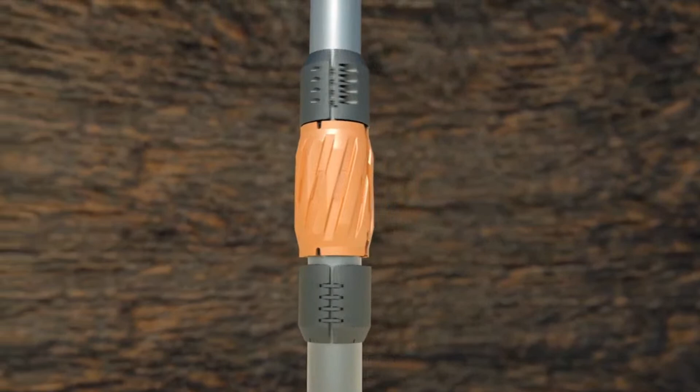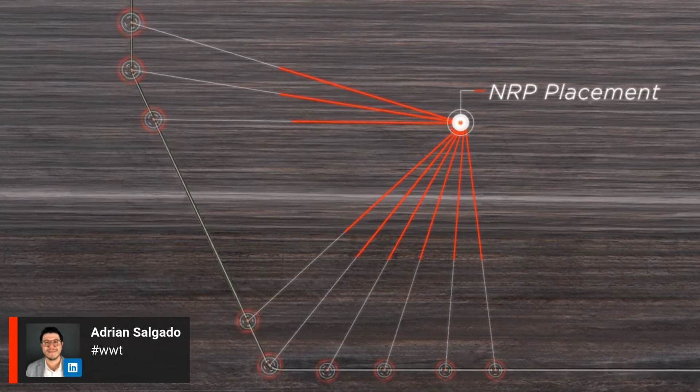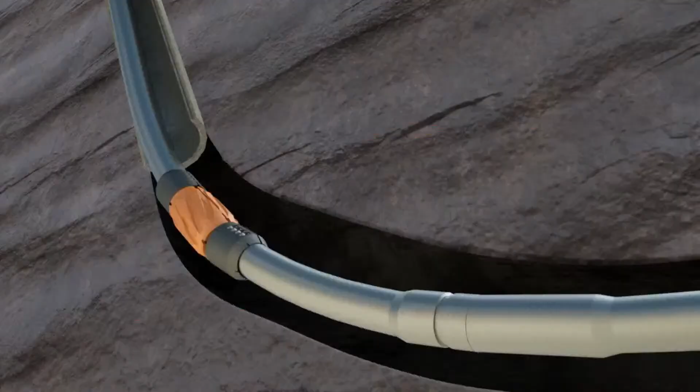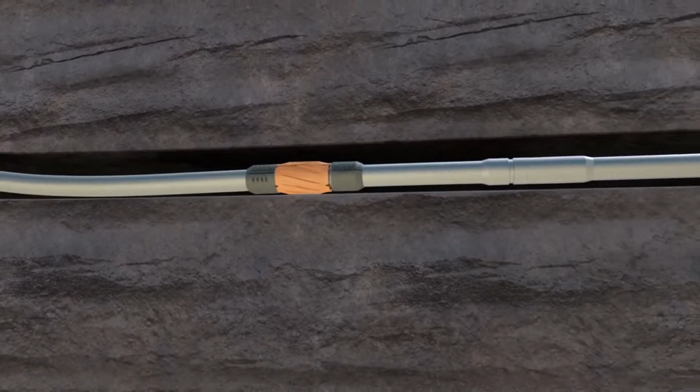WWT non-rotating protectors, otherwise referred to as NRPs, are the world's most widely used mechanical drill string, torque, and friction reduction tools. NRPs optimize drilling performance by delivering maximum energy to the bit while reducing torque, drag, casing and riser wear, heat checking, and buckling. Friction occurs when the drill string rotates and slides in the wellbore. WWT's patented fluid-bearing technology within the NRP sleeve creates maximum torque reduction. WWT provides a torque and drag analysis to identify specific areas within the wellbore to place NRPs. NRPs are typically placed across intervals where high side forces are analyzed, such as build or drop sections of the wellbore. NRPs are commonly used in horizontal, S-shaped, extended reach, and even vertical wells when unexpected dog legs are encountered. Unlike conventional rotating drill pipe protectors, the patented NRP rotates minimally to provide torque reduction without adversely affecting axial drag. NRPs provide the most efficient solution for reducing friction-related challenges that impede drilling performance while mitigating casing and drill pipe wear. WWT's NRP is a multifunctional tool with more than 30 years as a proven solution for reducing torque, drag, buckling, and heat checking, while protecting your casing and riser from preventable wear. WWT offers a no-cost confidential analysis with a recommended NRP proposal on your well, and 24/7 support both on and off the field.

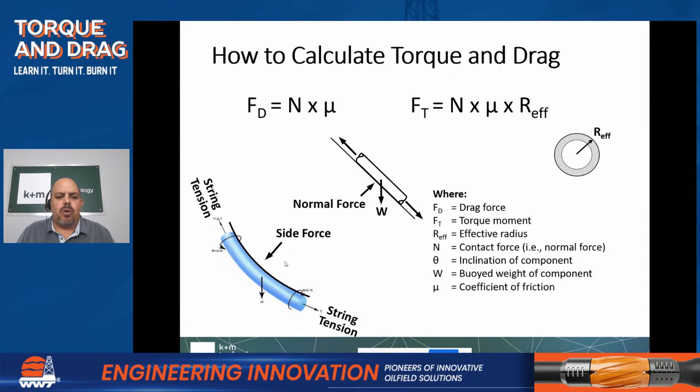There are a couple of different things that contribute to normal force. One is just the weight of the pipe laying on the low side of the hole. Another is the amount of side force that happens when you take something, put it across a curve, and put tension on it. There are actually 4 total contributors to drag: the weight component, the tension component, and whenever you have a curve, what's called the capstan effect.

Let me see if this is in frame so I can demo something. I have a wire right here—hopefully you can see the back of my chair. If I take this wire and put it across the bend without any tension on it, it does not push into the chair very hard. If I start pulling tension on it, you can almost see the fake leather of the chair start getting indented. That's the normal force due to tension around a curve.

And then whenever you put pipe into compression and it buckles, that pushes into the side of the hole a little harder. One of the topics a few weeks ago was the difference between stiff string models and soft string models, which try to account for the stiffness effect. Pipe is steel, it's inherently rigid, so if you try to bend it, it wants to go straight. Most of what I'm going to talk about today concentrates on the first two things: the weight component and the tension component.

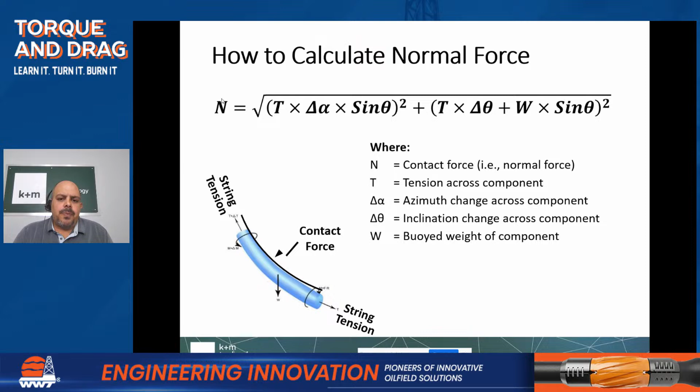So what are some problems that high normal force causes? One of them is obviously high axial drag—so not being able to run in hole, or running out of weight.

That could be with your drill string, that could be with casing, that could be with a liner. With a liner, if you're trying to run in the hole and you just can't get down to bottom, that's obviously because a high normal force times your friction equals a lot of drag. Drag always acts in the opposite direction of motion. So if you're trying to run in the hole and you have high drag, it's going to prevent you from getting down to bottom.

Well, it acts in the opposite direction of motion, so if you are trying to trip out of the hole and drag is really high, it might prevent you from tripping—either with a drill string, you try to pull and you exceed the tensile limit of the pipe, or the pull limit of the rig. So you try to do a straight pull and it doesn't work, and now you have to back ream out of the hole just to keep your tension low. So it could prevent you from running in the hole, and it can prevent you from pulling out of the hole.

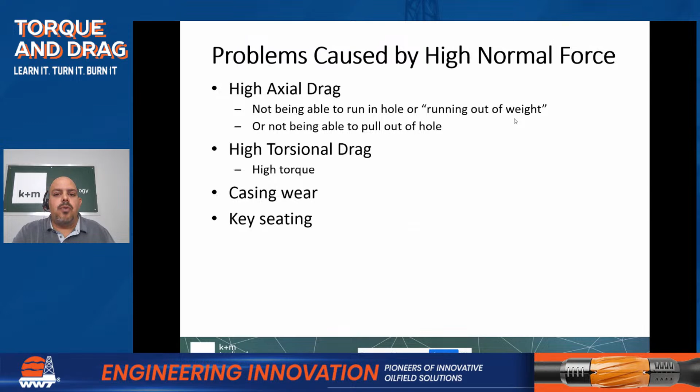So I said we ran out of weight. First, let's define what exactly we mean by running out of weight, because we hear that a lot. There are two contributors, two ways that you can, quote unquote, run out of weight.

One of them is a negative weight situation where the drag is so high that your hook load goes down and down, and then it's zero or less, and now you have to apply some push force to overcome that drag to continue tripping in the hole. If you had more weight available, you'd be able to trip in the hole.

So that's one. The other one is buckling. If you run out of weight because the pipe buckles, in this case it's not going to run down, even if I do apply weight. It's a frequent problem with drill strings.

If you're running a liner, the running string itself can buckle. Smaller casing, anything with a small OD, has less buckling resistance, so it's easier when you put it under compression that it starts to corkscrew and buckle.

And when that happens, supplying any more push is not going to help. The onset of buckling can be very sudden, so it's really hard to determine if it's buckling itself or some mechanical obstruction, in the absence of some torque and drag modeling.

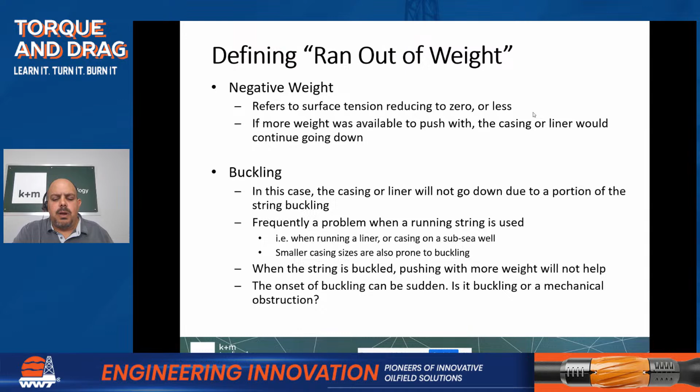But what the modeling is telling me, assuming the modeling is accurate and accounts for the additional normal force due to buckling, is that if I could push with 100,000 pounds at surface, I could actually get the casing down for up to a 0.6 friction factor. Let's say that's my design factor.

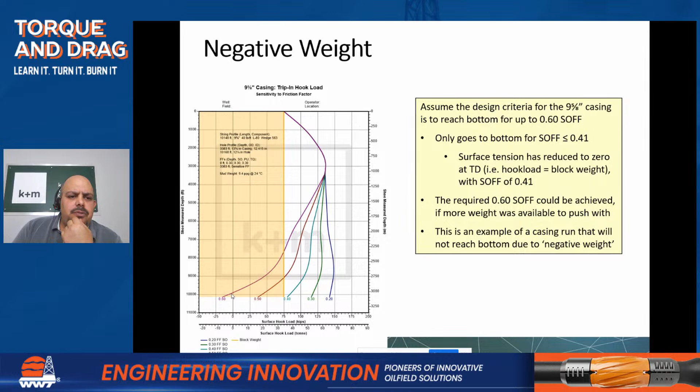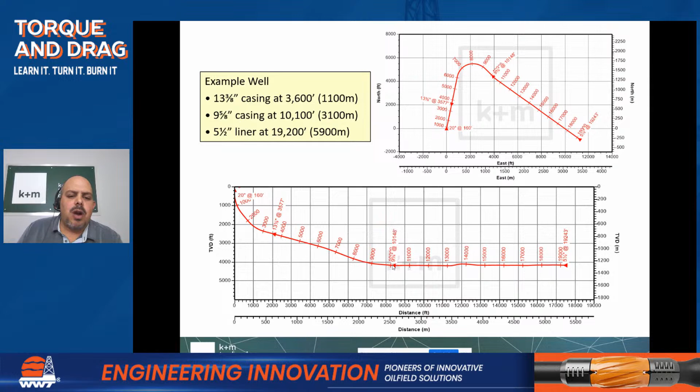This is a little confusing, so let me step back for a second. The next thing I'll show is this exact same hole, but assuming I drilled a slim well where I set 9 5/8 casing here, drilled an 8.5 inch hole, and now I'm running 5.5 inch casing in it. This is what it looks like.

If I have 9 5/8 casing in here, you can see that if I apply about 15,000 pounds of push, maybe a little more, I can get down for a 0.25 friction factor. For a 0.3 friction factor, it locks up.

That's what happens when this shoots off to the left — I don't know if things get mirror imaged or not, but it shoots off to this point over here. And if I went to negative one million, it would still go off to the left. What it's saying is it doesn't matter how much push I put on it — it's buckled and it's not going to go.

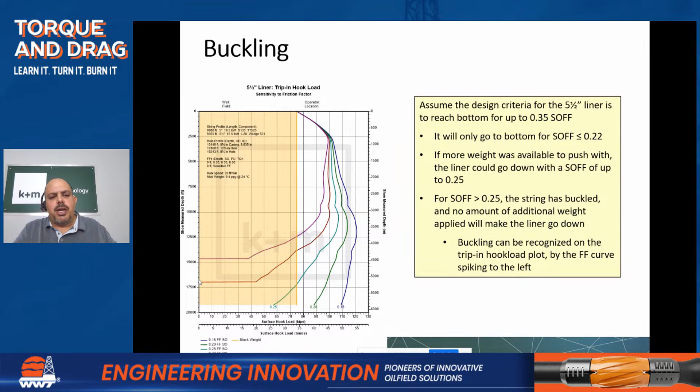Okay, we're about 30 minutes in, and I'm just going through concepts right now. The reason I'm spending time on this is because it's really important to identify the source of your problem in order to come up with a solution that works.

So again, I'm going to go back over these important equations and show them multiple times. Remember that the drag force is normal force times friction. Torque is normal force times friction times your effective radius, where effective radius is the radius of whatever is in contact with the wellbore. And then this is the normal force equation again.

So if my drag force is unacceptable, there are a couple ways I can go about finding a solution. The first one is just accepting that drag is what it is, and I'm going to have to overcome it. That only works if you have a negative weight solution. If you have so much compression that you have buckling, you can't just overcome that drag.

Okay, so that works for a negative weight solution. The other thing you can do, since drag force is two terms multiplied by each other, is try to reduce my normal force, or try to reduce friction. If I reduce either one of these, my drag force is going to go down.

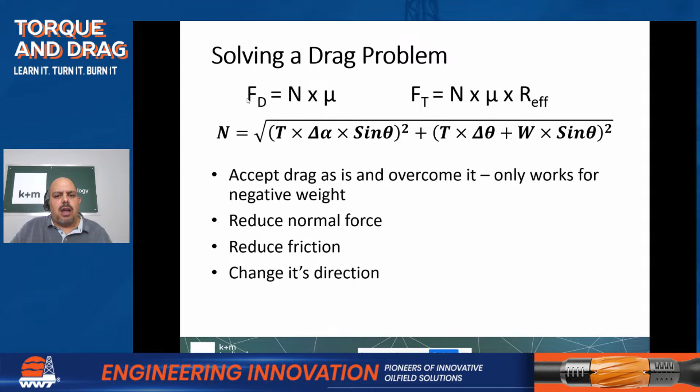The other thing I can do is change its direction. Brandon talked about this early on, and we'll discuss it a little bit more here. So if I have a lot of axial drag, can I change the orientation of that drag from axial drag to torsional drag?

So let's look at the solutions for negative weight: provide additional push to overcome your drag force.

In drilling, for the longest time we were drilling with motors. Rotary steerable was not a thing. With motors, you typically have some amount of heavyweight drill pipe in the low angle section of the well. That provides two purposes. One of them is it's a heavy component that overcomes the drag in the lateral part of your well, so you can overcome that drag and push down.

The other thing your heavyweight does is it transitions the pipe from compression to tension, and if you have tension in your string, you can't have buckling. That only works to a certain point, because if you have so much drag in your lateral that it buckles, then having heavyweight drill collars in the vertical section is not going to help.

And you're not going to be able to drill with a motor.

I started in '98. Just to give you a little bit about my history, I went to the University of Colorado, go Buffs.

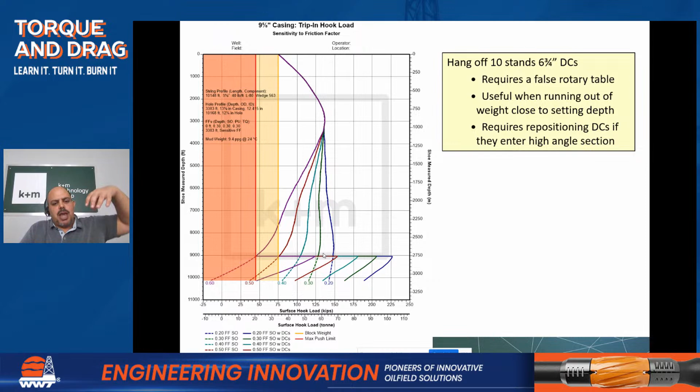Right when I install that packer, it's right below the rotary table. But as I go in the hole, as soon as it gets into the higher angle section of the well, it starts adding drag. So if this were to go a little bit further, I'd have to go in there, retrieve that retrievable packer, pick it up, and set it in the vertical section again. So it would require repositioning the drill collars if they enter the high angle section.

The other thing you can do to reduce your normal force is to reduce the dog legs in the shallow section of the well. You can reduce the dog legs in the shallow section of the well, reduce the weight in the high angle section of the well, or have it - we'll talk about floated casing here in a minute.

This is a possible solution for both - reducing weight in the high angle section of the well is a possible solution for negative weight and buckling, because if I reduce my normal force in the high angle section of the well and that reduces the drag to the point that I don't buckle anymore, then that solves both issues.

So we talked about why reducing the dog legs in the shallow section of the well matters, because when my angle is very low, the amount of normal force is very dependent on tension and how much inclination change I have.

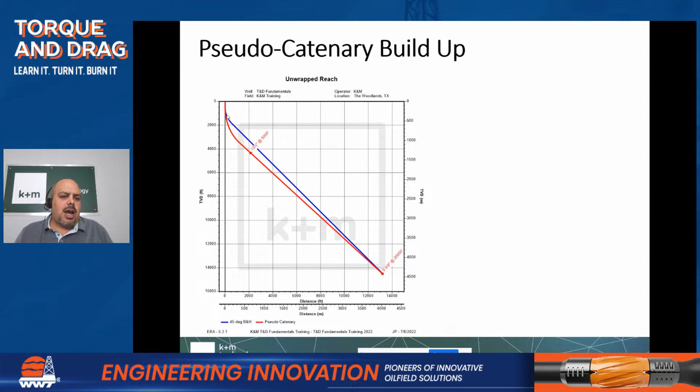So some people have thrown this term around, the whole pseudo catenary curve or catenary curve. What is a catenary curve? Here's an example well, a fairly deep TVD well, 14,000 foot, and I have a shallow dog leg here. The blue line is a 45-degree well with a 3-degree buildup. The red line is a well where I'm gradually increasing my build rate to build a catenary curve. What is a catenary curve? It's what's called the perfect curve - your side forces are normal or equal throughout the curve. You don't have higher side forces and then lower side forces; the side forces are uniform. It's how umbilical cords are hung, like the shape an umbilical cord makes when it's hung, or arches.

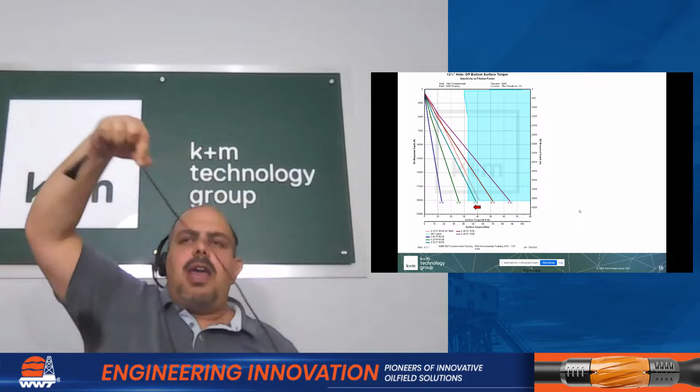See, I got a little prop right here - it's just a wire that I grabbed out of one of the offices. If I have my surface right here and say this is the downhole location, and I'm holding the wire, you can see that is not a uniform curve. It's not like a fixed build rate from surface here down to bottom - the build rates are lower here and higher here. Why is that?

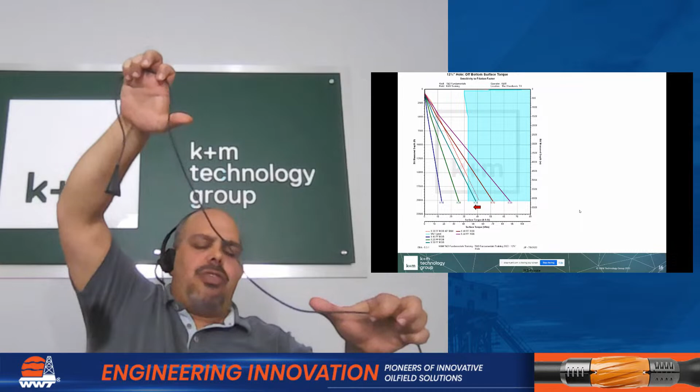Because the perfect curve means that normal force is constant throughout. How do you get a constant normal force? Well, at surface where tension is the highest, then my dogleg has to be the smallest. And as I go down and down, tension gets smaller and smaller, then my change in inclination, or build rate, can get higher and higher.

The reason why I'm bringing this up is because I've seen people hear the term catenary curve, pseudo catenary curve, and what they'll do is say, 'Oh okay, I like low normal forces, I want to solve this problem. I'm going to put a 300 section where I'm building at 1.5 degrees, then a 300 section building at 2 or 2.5 degrees, then a 300-foot section building at 3.5. Check the box, as I go deeper, inclination is increasing.'

Well, to properly... I'll get back to this. Well, okay, I guess I'll talk about this now.

What I'm showing here is the amount of torque generated for different friction factors with a 3-degree build and hold at 45 degrees. I have this light blue shaded area, say it's right around 30,000 foot-pounds of torque, which is right around the makeup torque of 5-inch drill pipe.

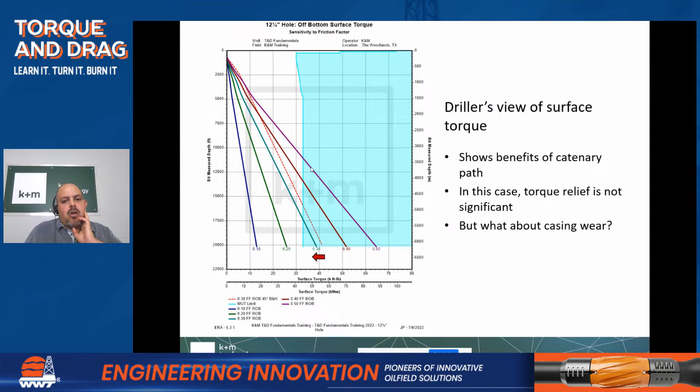So if I had that well, I would not be able to drill with 5-inch drill pipe unless my friction factor was less than 0.25. Anything higher than that, and it's a problem. And then the red line is the build and hold for the 3-degree build and holding at 45 degrees. These curves that I'm showing now represent this catenary curve shown right here.

So you're looking at this and it's saying, okay, well, with a 0.3 friction factor, I'm right around, call it 41,000 foot-pounds of torque with a straight build and hold. I've dropped it maybe 1,000 foot-pounds for a 0.3 friction factor with a pseudo catenary curve.

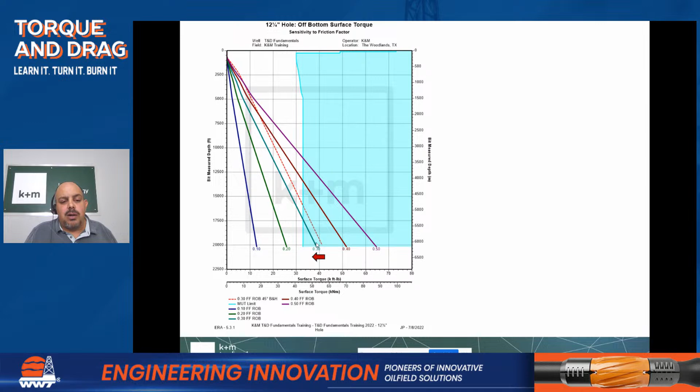And God, it was a lot of effort. I had to go in and put a schedule of increasing my build rates. Was this really worth it over 1,000 foot-pounds of torque? Well, if you look at the normal force...

Why is that? Well, because at higher than 2,000 pounds, casing wear does become a major concern. It's not to say that you're always going to have a casing wear problem if you have more than 2,000 pounds of side force, but it increases the risk quite significantly.

It'll depend on the hard banding, how high above 2,000 pounds, the formation you're drilling, it might even depend on the mud you're running. But if you have less than 2,000 pounds, one thing you can be comfortable with is your risk of casing wear goes down significantly.

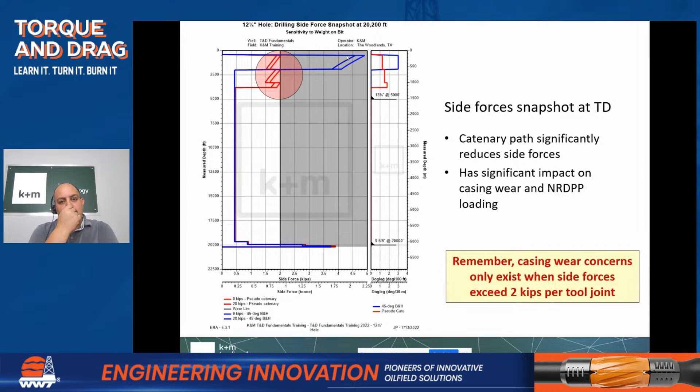Because it's called casing flotation, there are always a few people out there who think that the casing is, let me adjust my camera a little bit so you can see everything I'm doing with my hands, actually floating on the top side of the hole.

That is not the case. You do not want casing that's actually positively buoyant, because if casing is positively buoyant, it would push out of the hole. Anybody who has cemented surface casing or a surface conductor knows sometimes you have to chain it down so the casing does not float out of the ground before the cement sets up.

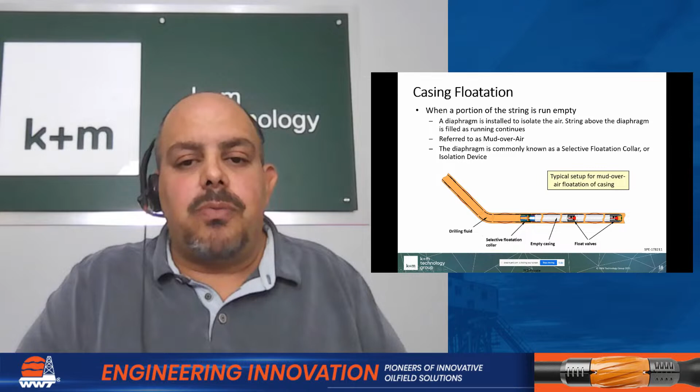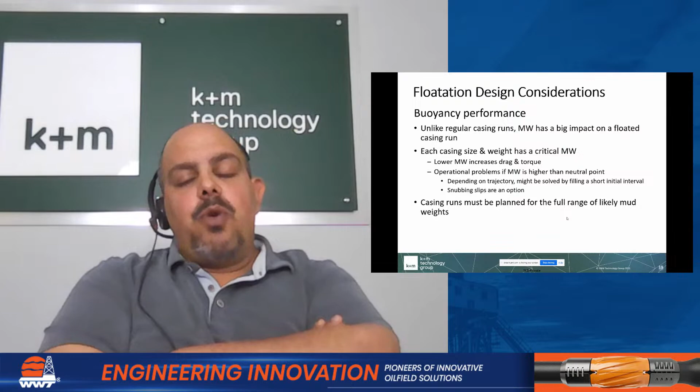How buoyant the casing is depends heavily on mud weight. Normally when you run casing, the buoyed weight is hardly even noticeable if you go from like a 9 to 9.5 to a 10-pound mud. That's mostly a calculation where you figure out the buoyed weight of the casing depending on the mud weight.

But when you are running that casing empty, it becomes very dependent on the mud weight. Each casing size and weight has a critical mud weight where if you run a mud weight higher than that, it will be positively buoyant.

Some ways you can overcome that is maybe fill a portion of the casing to make it a little heavier, but then it's kind of defeating the purpose, because the point was to make the casing light. Now it's too light, so you're filling it with mud again. It becomes pretty complicated.

So you want to plan your casing run for the full range of mud you're going to use. Each casing has a critical mud weight. This is typically limited to 9 5/8 and smaller casing when you're floating. There was one case we evaluated, not a deep water environment, it was offshore, where they planned on using 13 5/8, 88-pound casing just to keep it from being positively buoyant.

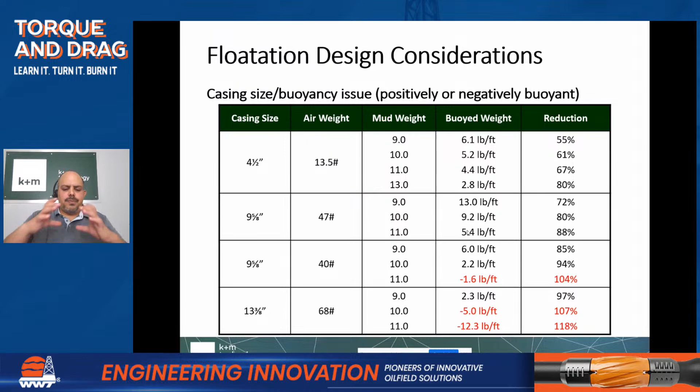The easiest way to calculate the buoyed weight of the pipe is to figure out how much volume it's displacing, what is the weight of the casing, and what is the weight of the fluid you're displacing. In the simplest terms, that's how you calculate buoyancy. If I have 1 cubic foot that weighs 5 pounds, and I put it in a fluid that displaces 5 pounds, then it sits completely neutrally buoyant. It won't float, it won't drop.

If I put it in fluid that displaces more than 5 pounds, it's going to float. If it displaces less than 5 pounds, it's going to drop. And that is why for the 4.5-inch casing, the air weight is 13.5. If I run it in 9-pound mud, the adjusted weight is actually higher than 40-pound casing in 9-pound mud, because the volume that 4.5-inch casing is displacing is smaller. So the reduction is smaller in smaller casing sizes.

So the sweet spot is right around 9 5/8 casing, that's where we see floated casing happen most often. You can do it with 7-inch, you can do it with production casing, we're doing it quite a bit here in the U.S. But once you get above 9 5/8, it becomes very difficult.

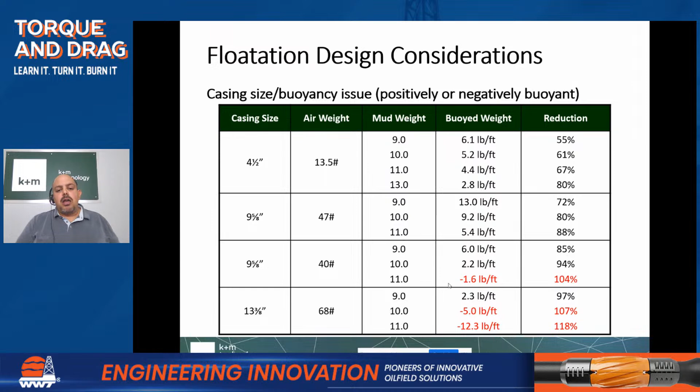Typically, that's how you want to do it. You want the air to come out from inside the casing. Usually you install a cement head because there can be a lot of bubbling at surface, and you want to route that back to your active system to capture any fluid that's bubbling back, and then you fill your casing.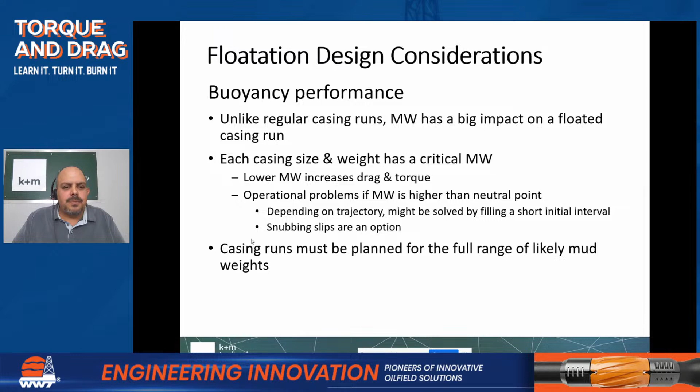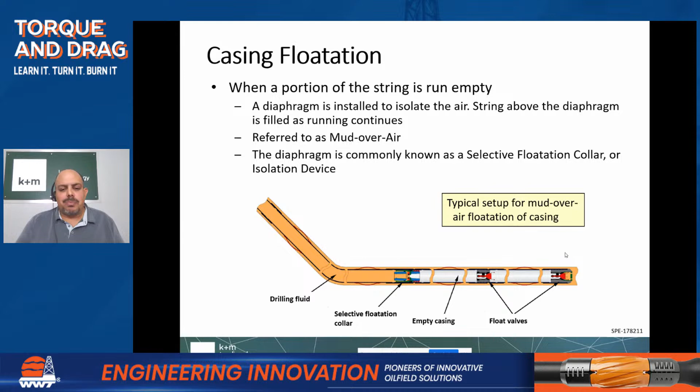So some things that you need to consider if you plan on floating casing. The hole has to be very clean prior to attempting to float the casing, because when you float your casing, remember, this is a void filled with air. That does not allow you to tag something and say, well, I'm just going to wash through this. It's not going to work. Once you fill your casing, you're not floating anymore, and a lot of times that ends your cement job or your casing job.

Delta Tech, however, does offer a solution to float casing and be able to circulate it, including during the cement job, which is pretty interesting.

You might want a casing running tool to facilitate either pushing or reaming the casing, because it is very close to neutral. We're not even going to talk about hydraulic lift effects, but when casing is close to neutral, pushing the fluid out of the hole causes some hydraulic lift. So just the fact of tripping in the hole causes some hydraulic lift. Normally, that's not noticeable under a traditional casing job, just because you have so much tension at surface. But when you're only working with 10 or 5,000 pounds or 15,000 pounds of positive tension while you're running your casing, now some hydraulic lift becomes very noticeable.

You also need to be prepared if that casing collapses. So if you have a connection leak or if your casing collapses, the mud is going to go down the annulus to fill that void inside the casing. So you always want to be lined up to fill your casing.

Fluid logistics is a big one that people may not consider. If you run one joint of 9 5/8 casing in the hole, you displace roughly 4.5 barrels of fluid out of the hole. That's a lot of fluid for each joint of casing. Normally, we don't even think about that, because that fluid coming out of the hole, we're using that to fill the casing. But if you're floating the casing, that's not going back in the pipe. So you need some place on your rig to store all of that fluid, because you're not going to put it back in until the very end.

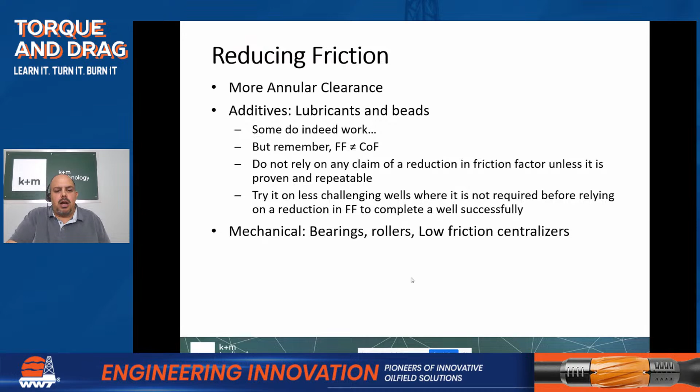You can also have some mechanical tools like bearings, rollers, low friction centralizers. So let's talk a little bit about those. Here's some examples.

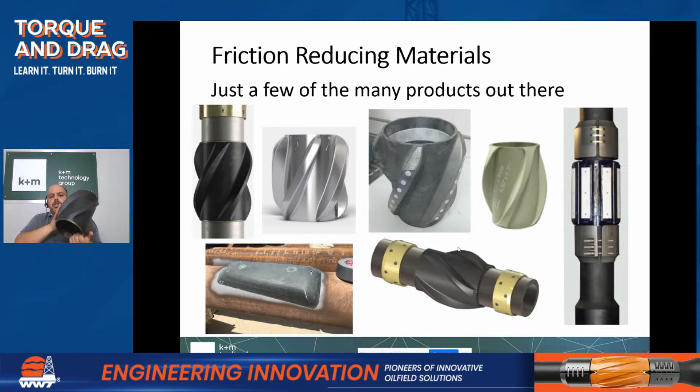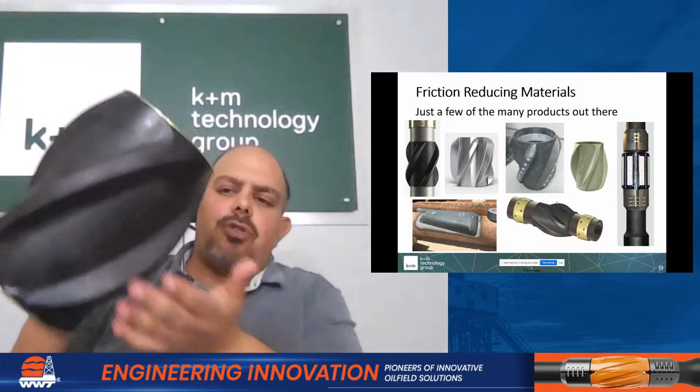So, low friction centralizers - just keep in mind that if you have high normal force, that's a lot of load on these. And if these are not steel, are they going to be able to hold up? Again, I would want to make sure I try these on easier wells first.

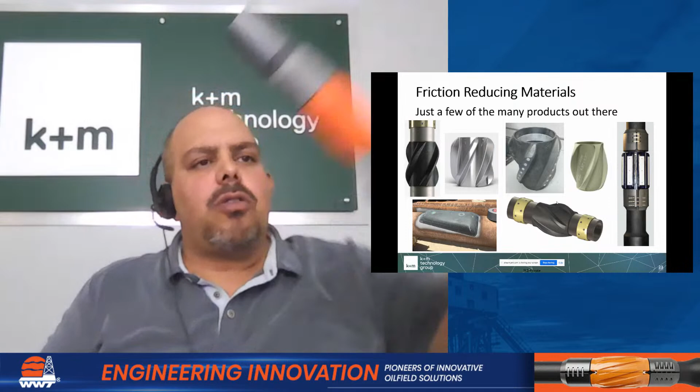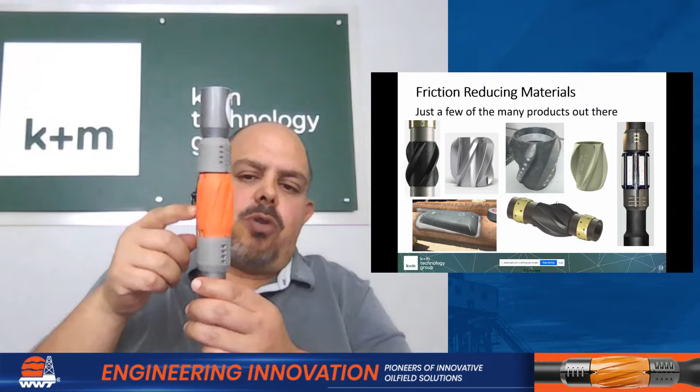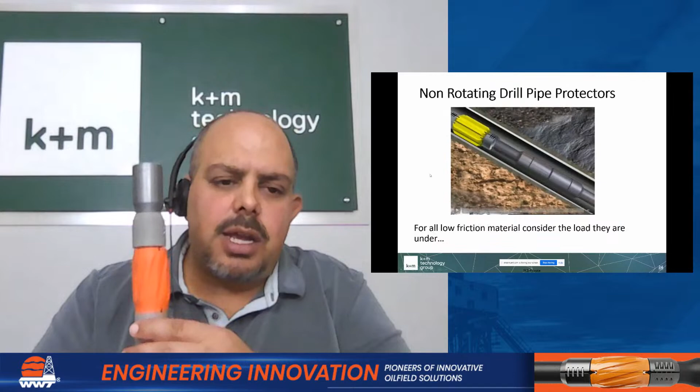This is not going to reduce your normal force, but it will reduce your friction and your torque in a couple of ways. So I do have the video. You want the non-rotating drill pipe protector installed very close to your tool joint. The idea is that you provide some standoff for your tool joint. I've seen people order these and then install them mid-joint.

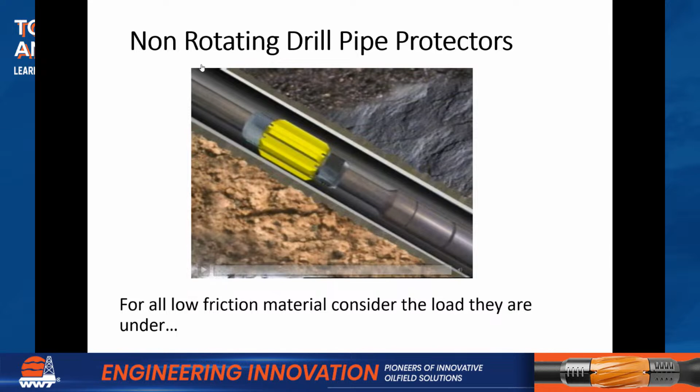If you're installing them in the middle of the joint and your tool joint is still in contact with the side of the hole, they're really not working the way they should be. The idea is you want this tool joint to not be touching the side of the hole.

When you do that, you reduce your torque in two ways. Normal force hasn't changed, but now you have a mud bearing between the sleeve and the pipe itself. Remember in that equation that the rotational drag or torque is normal force times friction times your effective radius. Well, if this is 5-inch drill pipe with a 6 5/8 tool joint, your effective radius normally is half of 6 5/8. Now the effective radius is half of the diameter of the 5-inch drill pipe. So your effective radius has gone down, and now you also have a fluid bearing where this is rotating inside of it. So these do work.

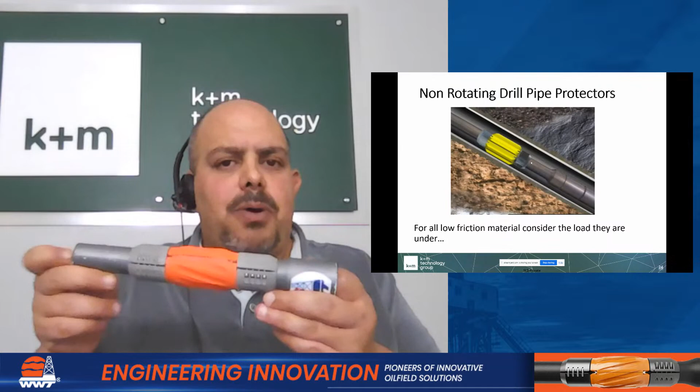You just want to install them in places where the normal force is actually high. We've seen people try to run these at the bottom of the well because everybody thinks the drill pipe is laying on the low side of the hole in the high angle section, so that's where all my torque is coming from. So if I install these, it's going to do a great job reducing torque. But remember, your normal force is probably not the highest down there - it's the highest shallow, where you have your highest tension, and where the biggest dog legs are.

Some roller options - so they've got one of these also.

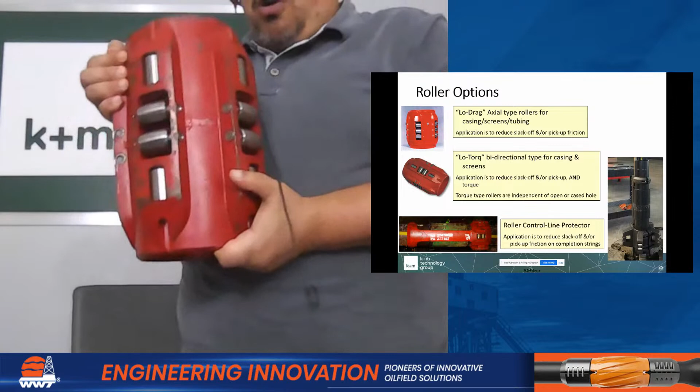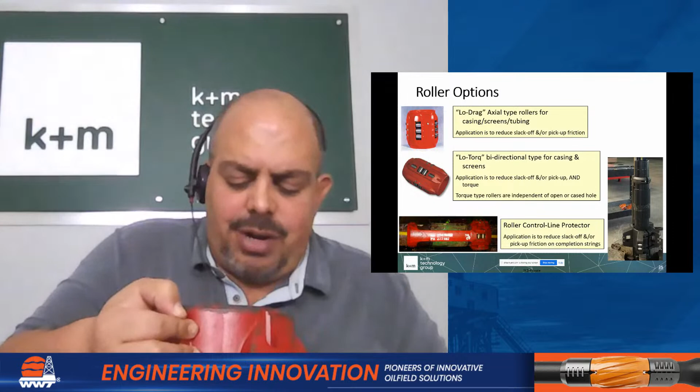These things are heavy. So these are bidirectional rollers. You would install them on casing. I don't even know if they produce these anymore, honestly, but I still want to show them to you so you can see how far those rollers are protruding out.

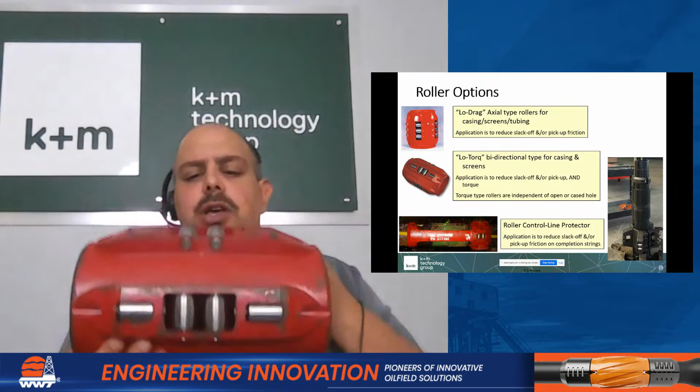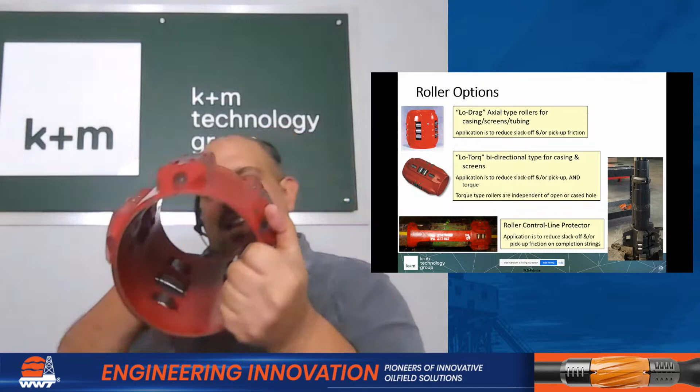These rollers are axial rollers, intended to reduce drag. These rollers extend internally, so your casing rotates inside of them and they reduce torque. These are bidirectional rollers. They're heavy, they're expensive. It's been a long time since I've seen somebody use some of these.

Especially with the increased instances of people floating casing, that tends to be the preferred option. That's a lot easier now, or just reaming casing down that's mud filled if your torque can handle it. The reason why we typically float casing - well, we'll talk about reaming here in a second. In 9 5/8 casing, the weight of the casing is so heavy that it becomes difficult to rotate it down. Smaller casing size, sure, you can.

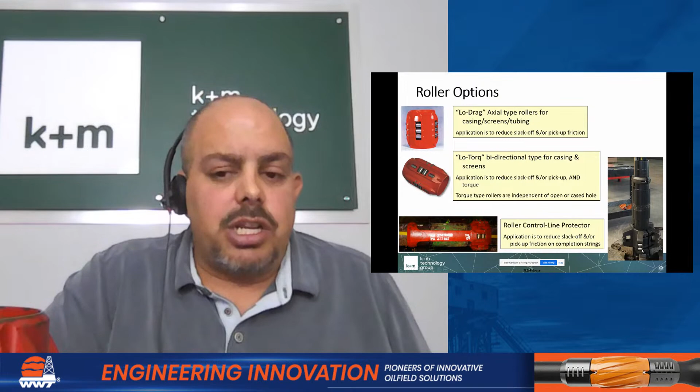What I'm showing here on the right is for anytime you run a completion that has hydraulic lines, fiber optic lines, something that prevents you from rotating it - this is where we currently still see them. So here's a clamp with rollers on it. Notice how big the clamp is, because this needs to be sized to the size of the hole you're running it in. If you put it in too large of a hole, then the thing just flops over on the side. You need these rollers to be actually acting on the casing.

If they're not acting on the casing, if the thing just flops over sideways and it's dragging along, there's just not going to be any benefit. So this is where rollers for casing - these types of rollers - pretty uncommon. Haven't seen them in a really long time, but the instances of us seeing them is actually increasing.

And just like what we said about lubricants, well, a couple things need to happen. One is that your casing needs to be incredibly clean. Look at how far that wheel is extending. So if you have a cuttings bed or any amount of dirt in there, that wheel is not going to help you out any. So your casing that you're running this in has to be incredibly clean, for one.

The other thing is I would like to document how much of a drag reduction or reduction in friction I am actually seeing. We've seen some of these have a fairly decent reduction in drag in the larger size hole. We were just looking at a case a few weeks ago where it was like 3.5-inch tubing, I believe, inside 7-inch casing, where it was still a 0.35 friction factor, which is much higher than what you would assume if you had ball bearings.

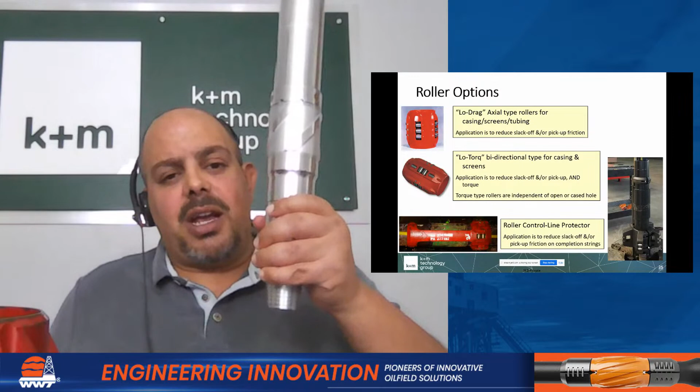Just on the topic of bearings, this is similar to the Western Well Tools one, but it's a sub, so you probably only install one of these per joint. The other two joints are still going to be in contact with the side of the hole, but because this is steel, it can take a higher side load. The Western Well Tools ones have a fixed limit of how much side load one can take before you exceed its loading, and then you have to install multiple ones to keep it within spec. Like I said, it's a shotgun of information - a lot of information in a short period of time.

The last part we talked about - we talked about reducing normal force, we talked about reducing friction, and we also talked about some ways to overcome it: change its direction. So remember, if I am running in with a liner, drag is always in the opposite direction of motion. Right here at the float shoe, I don't have any drag, and it's in the opposite direction of motion, and it's a cumulative effect. So drag gets higher and higher and higher as I come up the string, and I get more and more compression. In this case, let's say the compression has gotten so high that I have buckled my string.

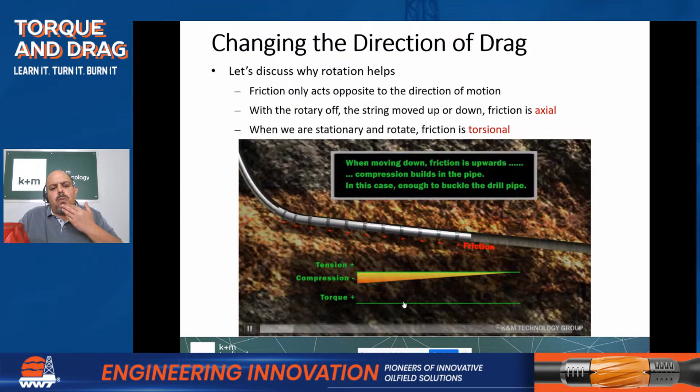So that's when I'm trying to trip in the hole. Now, if I stop - say I pull it into tension first to get rid of that buckling - now if I just stop right there, and this is a completely horizontal well, if I sit there and start rotating, then I have no compression, no tension in the lateral, and all I have is torque. What about if I'm tripping in the hole?

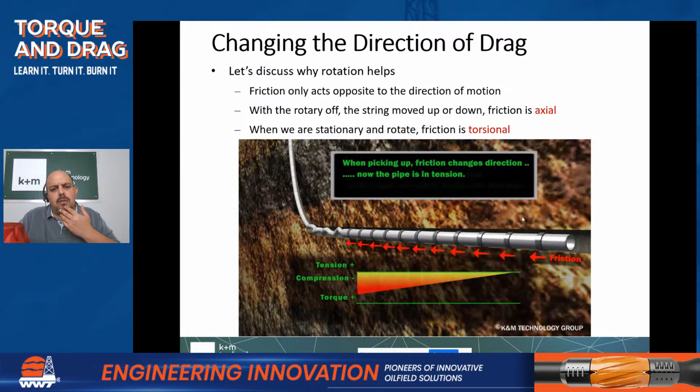So if I'm sitting there rotating at say 20 RPM, I get a certain amount of torque. Now, when I'm reaming in the hole, the drag is bidirectional. I have some of it in the round and round direction, some in the up and down direction. How much is in each direction, I have full control over, which is a yay moment. There's a lot of stuff we don't have control over, but the fact that we can manipulate how much drag we have based on our operational practices is something we should celebrate.

So if you just run this again, 20 RPM, I end up with a certain level of torque, and now I'm tripping in the hole. You'll see that I'll get a lot of compression at 20 RPM. Now, if I increase my RPM, then my compression load will go down, because more of the drag is in the round and round direction.

How much of it is in the round and round direction and how much is in the axial direction, it's really just vectors. So I have V sub A, my actual axial velocity, which is how fast I'm tripping in the hole. V sub C is my round and round velocity, circumferential velocity.

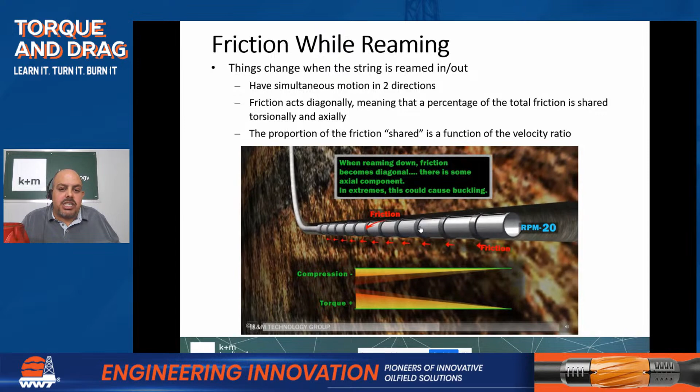If I put a dot on one of these casing collars, and I wanted to see the overall velocity of that dot when I'm reaming, that's the resultant velocity, because it's going round and round and also up and down. So how do I calculate the total velocity on that casing collar?

You take your axial velocity squared plus your round and round velocity squared, and you square root it, and that's your total velocity. V sub C is pi times d, the diameter of the tool joint.

This is just because normally we talk about tripping speed in feet per minute, and the diameter we usually talk about in inches. So if we want everything in feet per minute, that 12 is just a conversion factor from inches to feet, times RPM, how many revolutions per minute.

So V sub C will go up if your RPM goes up. It's also very dependent on the diameter of your casing. A larger diameter casing, like 9 5/8 casing, has a huge circumference, so you rotate that at 10 or 20 RPM and it's moving fairly fast.

If I take a very small tube, say 3.5 or 4.5, and I rotate that at 20 or 30 RPM, the circumference is so small that the velocity around the circumference is very small when rotating at a low RPM. So small pipe would require me to rotate faster. Larger size pipe, I can get away with rotating at a lower RPM.

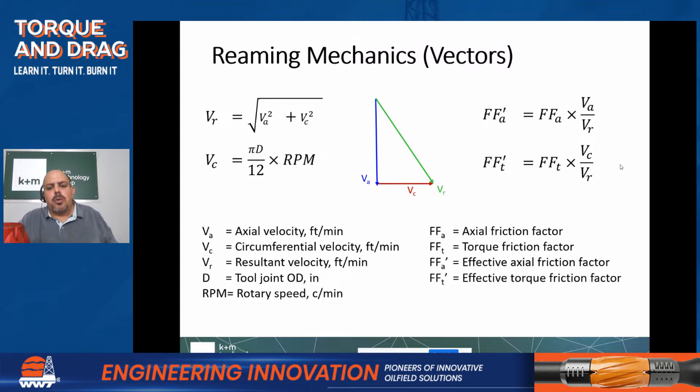And if you really want to overcome drag, if you have a drag problem and want to reduce it, then higher RPM and slower trip speeds are the way to do it.

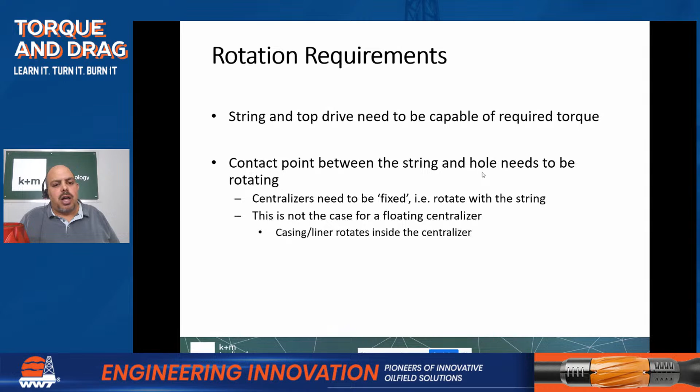The other thing that's important to note is that the contact points between the string and the hole need to be rotating. So if you're running centralizers, those centralizers need to be fixed for rotation to be effective.

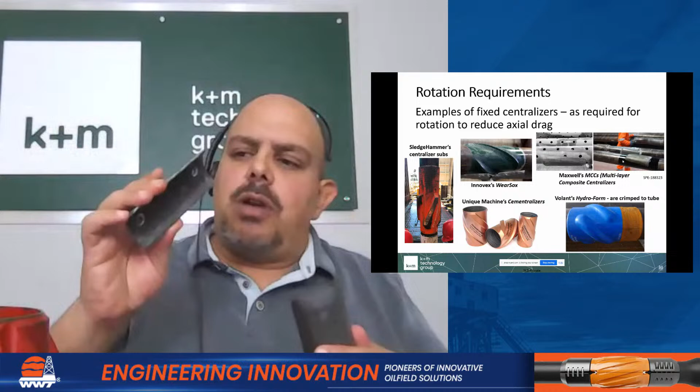Here's some different options, the centralizer subs, WearSox. This was developed ages ago where it's just applied to it. I think Halliburton has something similar where it's applied to the casing. More and more, there's these kind of things where they're epoxied onto the casing, where you can make your centralizers whatever shape you want on your casing, which is interesting.

Volant and Tesco have these Hydro-Forms that are crimped on. Unique Machine has one too, so this would replace your coupling - instead of your coupling, your coupling would be the centralizer. All of those are intended to be fixed. When you rotate your casing, the centralizer rotates with it, so it allows you to be effective when you're reaming.

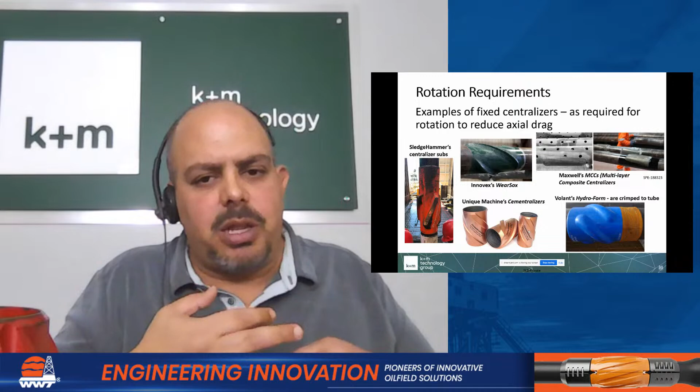I'll give you some hints too - typically these are less convenient than your standard centralizers, because those are easier to find, and these are typically more expensive. So some people don't like running the fixed centralizers.

So let me be absolutely clear that what I am for, what K+M's for, is good centralization that provides good standoff throughout, right? If you as an engineer or a superintendent or an organization just said that's an inconvenience that I'm not willing to accept and I don't want to do it...

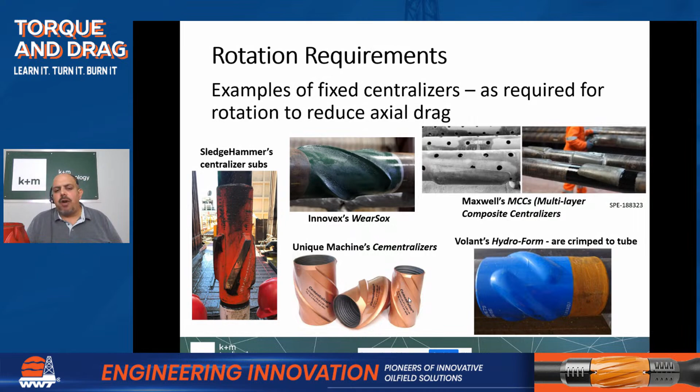Okay, well one thing you can do is run free floating centralizers, but run them at a frequency where you have zero standoff on purpose in between the centralizers. We've seen this done in US land, where it's unconventional, you're doing a lot of frac stages, and you just want a cement plug, good isolation in between your frac stages. So if your frac stages are, say for shits and giggles, every 120 foot, every 3 joints, put one centralizer on. In between them, you're going to have zero standoff, and you're going to get the benefit of rotating your casing down there. Where the centralizer is, you're hoping that at least provides a good enough cement plug to isolate frac stages.

Swivels are another thing that allows you to rotate one part of the string and not rotate the other. For them to be effective, you need to have high drag across the part that you're rotating.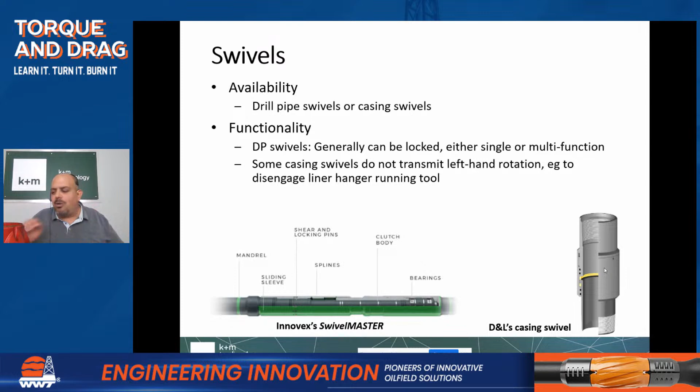So to me, I mean, it's a bearing there. I don't know, I haven't had any experience with it. Just like I said, I'm just throwing out what information we have and what is available right now.

Some programs allow you to model a swivel, some programs don't. If you have a program that does not allow you to model a swivel, just model the section of the pipe that's rotating, and then model how much drag is being generated by the section that's not rotating, and make sure that you can apply that amount of weight on bit or push at the swivel. That's all you're doing, really, because if the bottom of the string is not rotating, then you have drag there, and the top of the string that is rotating needs to be able to push and overcome that. So effectively, it's a weight on bit at the swivel point.

So that's how you'd model it if your torque and drag software can't do it, if it's not built into the program. But some, either if you have perforating guns, if you have screens, if you're exiting across a whipstock from a casing and you're worried about damage to anything, maybe you run it then. The normal drill pipe swivels, those you retrieve back to surface. The casing swivel, that's sacrificial, obviously, so that stays with the casing.

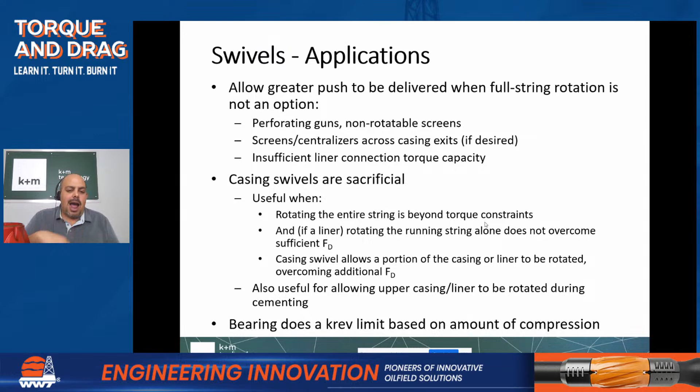And then the last thing to keep in mind with a swivel is that it is a bearing, and it's a bearing under a certain amount of load. So it's going to have some limit on that bearing life, depending on the compression load. The higher the compression load, the lower the number of rotations you can apply before the bearing fails. So it's just something to be aware of, that if you're using a swivel, it does have a limited life depending on what the compressive load is and how much rotation you're planning on doing.

And I think this is my last slide, and then we'll open it up for questions.

We haven't even talked about cementing yet. One of the best things you can do to ensure that you get a good cement job is to rotate either your casing or liner during the cement job. It's something that we have a very poor track record at being successful at.

And why is that? Because you run your casing, you run your liner, you see a certain level of torque, and then you start pumping your cement job, and that torque is not constant. It may go up, it may go down. Right when it exits the shoe, it might spike, and people start freaking out. Like, no, nobody wants to twist off. You've done all the hard work, you're at TD, the casing's there, you're just trying to cement it. So it's very easy to just say, no, I'm not going to do this, and shut it down and just be done with it.

So what we do is we model what the torque looks like. If this was a liner, this is the torque at the top of the liner, the torque seen at surface during a cement job. It doesn't really matter what the well looks like or what the well profile looks like. As you are pumping cement, as you're displacing fluid down, notice how the surface torque does fluctuate.

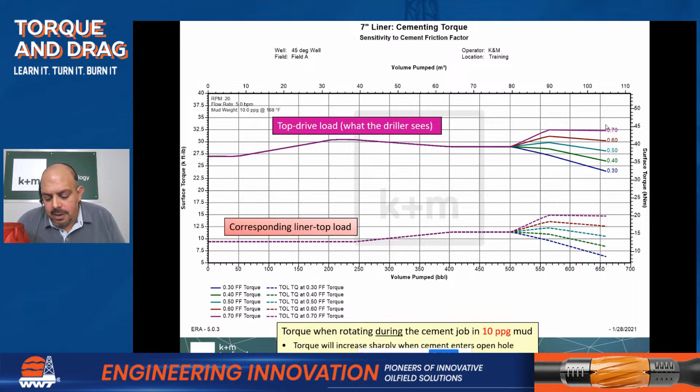So that is over an hour and a half. I think that is my last slide. So that is all I got.

Job well done, sir. Job well done. And I love the fact that you did it like show and tell. You actually had stuff to be able to show.

Yeah, we're in our office here, and so one thing that any service companies out there, we love lunch and learns. We are eager to learn. So if you have something new that we may have, Delta Tech came by. They said we have this system that allows you to cement so you can float your casing and circulate. You can also float your casing and cement, which is kind of cool because torque is one of the biggest limiters there. So people come by and we're eager to learn, and they also bring all sorts of stuff to show. So our office is cool, we got a lot of stuff to play with, all kinds of stuff there.

That's right, the only thing that's missing is a 3D printer. Oh, my office is not missing any of those, we have got plenty, absolutely plenty. So maybe I can drop by the K&M office someday. Absolutely, would love to have you. I think we've even been printing up some green ones. Yeah, they're a little bit brighter green than y'all's. If you print one, I want it. We'll call it David Gibson glasses orange. That's the color, I do have a bright orange filament.

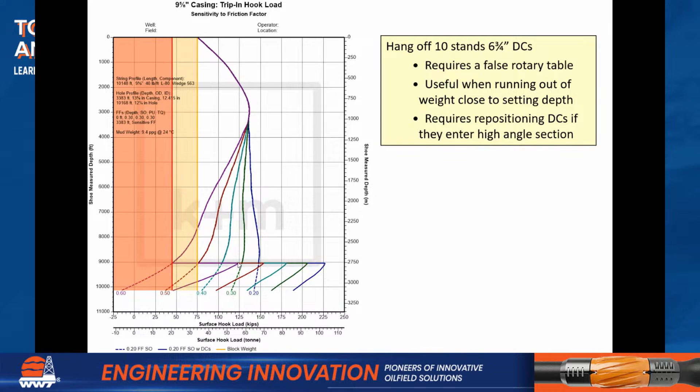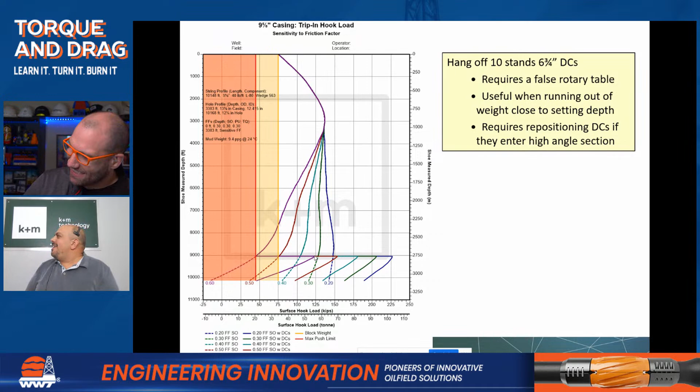I'll give you an actual number. From here, which is right around, we'll call it 45,000, to call it 120,000. So it's like, call it 70,000 pounds. It's like getting a 70,000 pound roughneck to grab onto your casing and jump up and down and add weight to it and push it in the hole. And that guy would have cholesterol problems and heart problems. He wouldn't be a roughneck, he'd be in a completely different profession.

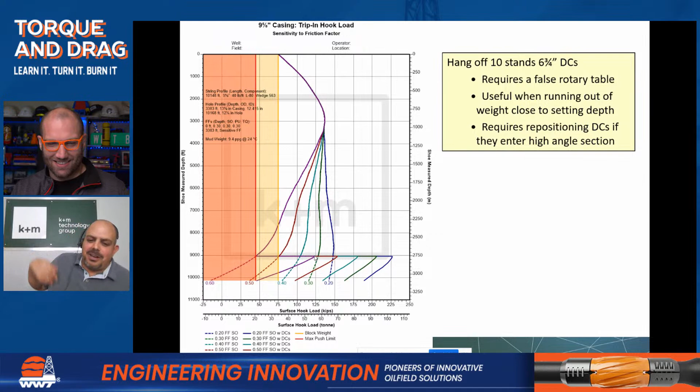So I got Chris, come on over here. You can't see, so just look at that camera right there. This is Chris Cutts. He's the general manager at K&M. He's my in-house Canadian.

There was a question on how the pull down systems work, because I talked about pushing pipe in the hole. So I figured, you being Canadian, you must know something about it, because that's the only place I know that uses them on a regular basis. Yeah, so in SAGD in Western Canada, because it's so shallow, they don't have much of a buckling issue, but they have more of a negative weight issue where they just physically can't force the pipe into the hole.

So the rig pull down systems are a hydraulic system that's essentially anchored to the substructure. As they're picking up the casing with a pipe arm, they'll make it up to the next joint that's in the rotary table. This system will essentially grapple onto the pipe and just pull it into the ground, putting that weight against the substructure. In some cases, these wells only go as far as they can go, because sometimes they can get to a point where they're physically lifting the rig off of the ground, because that's the capability of the weight of the rig and how it can grip the pipe and actually force it into the ground using the hydraulic rams.

In that case, what you can do is get a couple of super sacks of cal carb or whatever, put them on the rig floor just to add a little bit more weight. Or get everybody at the rig site standing on the rig floor, get everybody from the camp. But yeah, sorry to pull you in. Glad to contribute, glad to be here.

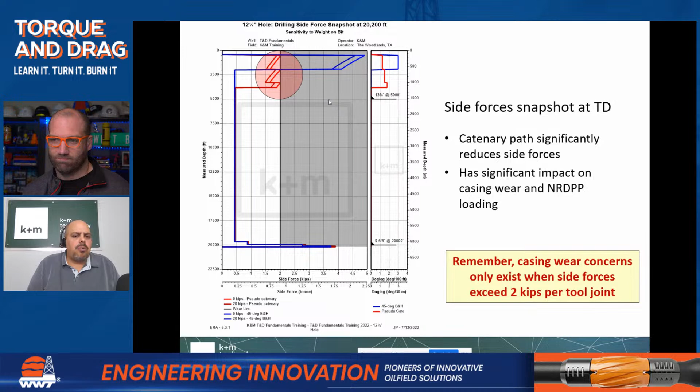So I worked with one operator that had steel casing, and then the bottom of their casing below where they planned to set the production packer was chrome. At the very bottom, at your target entry, there's typically very low side forces, but because it was chrome, they were eating away at the chrome casing. They did that for corrosion purposes, but they were eating away the casing so much that they said, well, it doesn't make sense to try and save the casing for corrosion purposes if we're going to eat it away while drilling anyway. So they dropped the chrome casing and just ran steel casing all the way down, because of the casing wear issues they were having with the chrome.

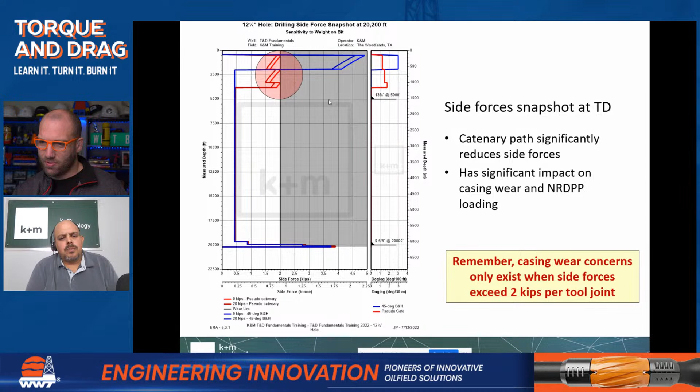So after floating the casing to TD and starting the cementing operation, breaking the disc, where does the air go? It's a good question.

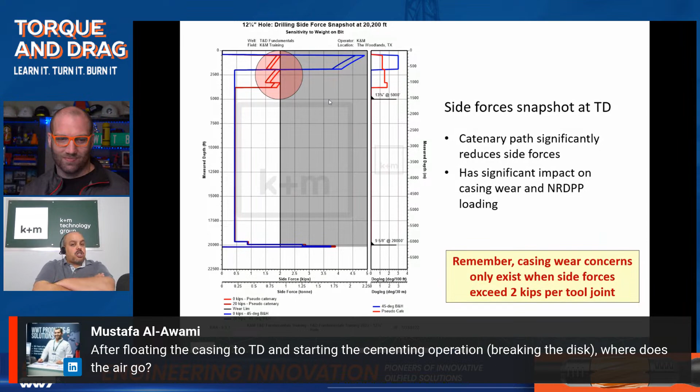Some people have circulated it out the long way. That's not something we would recommend. What we recommend is you install a cement head with no plugs in it on top of your casing, and use that to burst the disc. Then on the cement head you have two flow lines. The bottom line you can use to fill the casing. The top line you can route to your gas buster.

Because as soon as you rupture that disc, if you're standing on the rig floor when that happens, one, the casing will jump a little bit, so be prepared for that, don't freak out. And then the other thing is you'll hear the air, the casing go on a vacuum, because all of that fluid column is going to drop.

Then the next thing is you get all this air bubbling out. So typically what we do is you pressure up, you rupture that disc, you let everything come to equilibrium, and then you fill half of your casing. What we used to do is fill the casing while venting and try to find the perfect rate to fill it before it starts coming out the top outlet. What we found to be the fastest way is to just close the top outlet, fill half the casing, open and vent, fill it up three-quarters of the way, open and vent, and then just top off the casing. When you're at the rig and you open that top valve, you'll know when it stopped venting, because you can hear the air whistling across there.